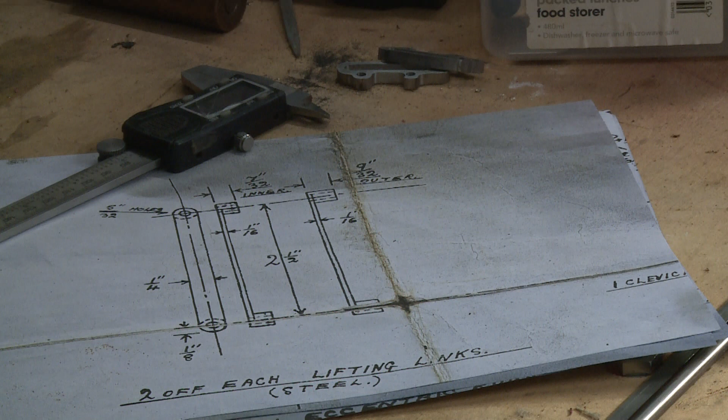We're going to carry on with the links that go between the eccentric straps and the valve rods. So you got the rods here. That's looking down on the plan. So we got 4 of those.

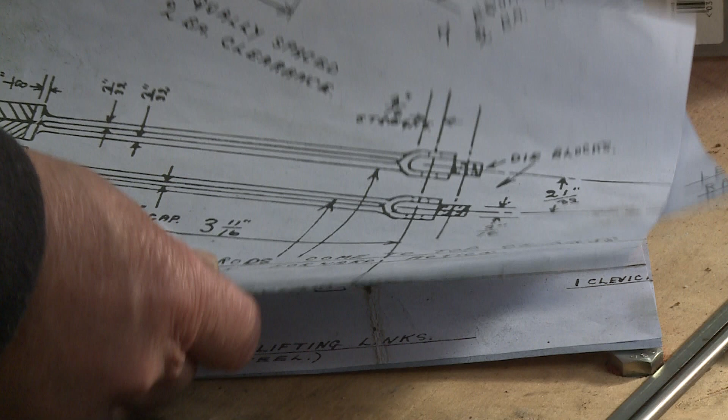That is the eccentric straps there, so they're bolted on there, going through to the link. Going through to the link. Then from the link, it gets joined on to, here's the link assembly there. The link goes inside there.

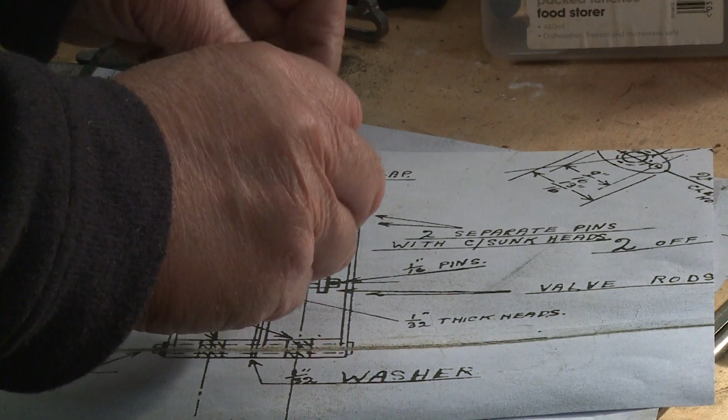So we got 2 each of these to make. You'll notice we got 2 of these and 2 of those. They're 2 different lengths there. So what I'm going to do is start off with those.

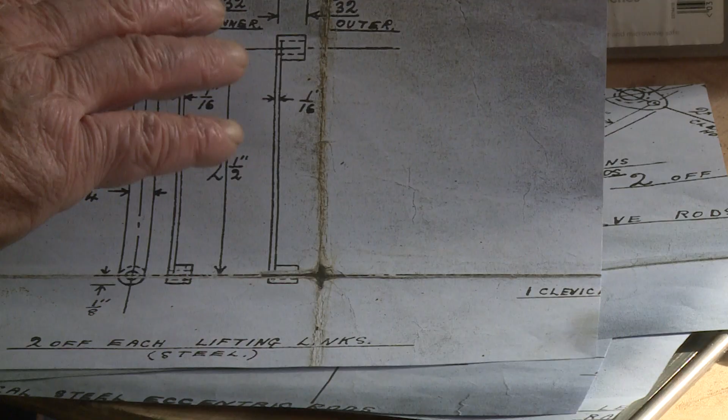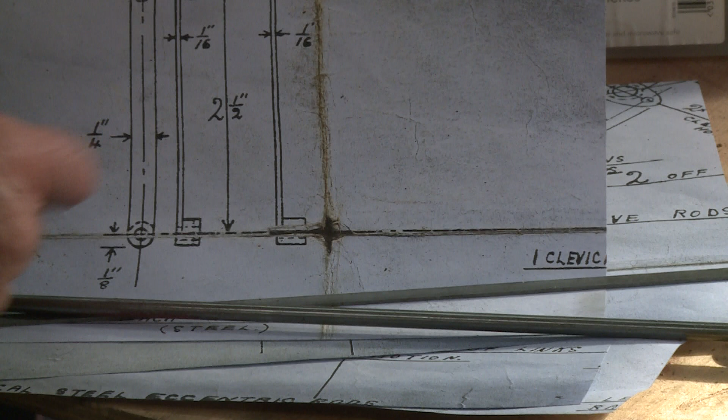So I've got some 1/4 inch by 1/16 flat, which I'm going to do 4. The holes are the same distance apart. 4 of the flats. Then the round we put in the lathe. We'll drill a hole through it.

But what I'm going to do there, I'll just see if I can find a pencil. 1 minute, bear with me.

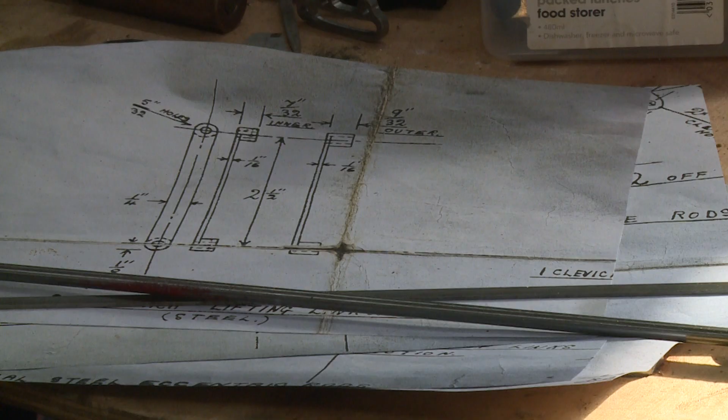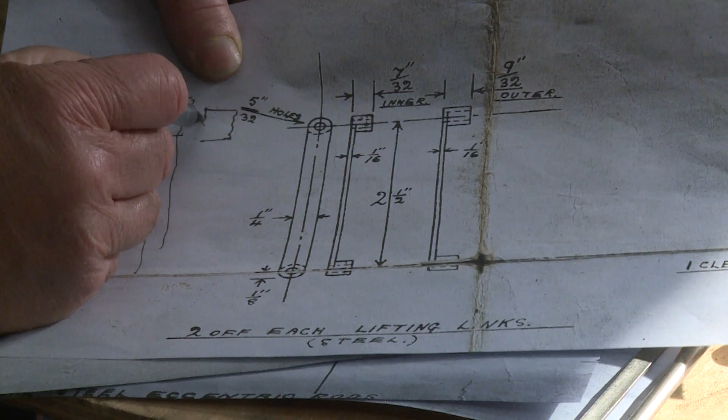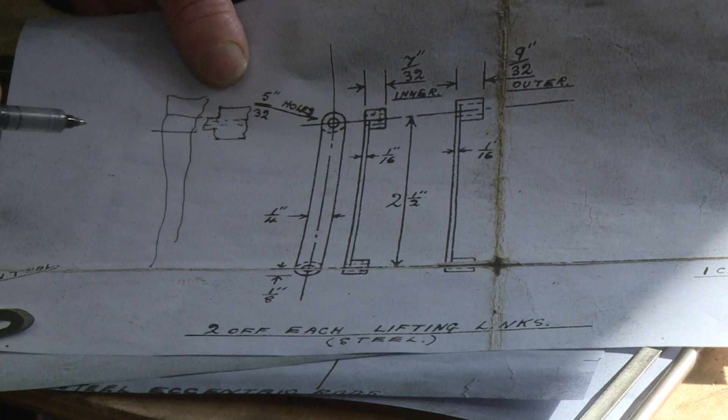So what I'm going to do here, where you've got the metal with the hole through it, the round with the hole through it, what I'm going to do is drill my round with a shoulder on it. So the hole is the right size through the round, and the hole in the flat is a little bit bigger. That way when you come to silver solder these little bits on, they're located in the hole. That's not to scale, that's a load of rubbish there.

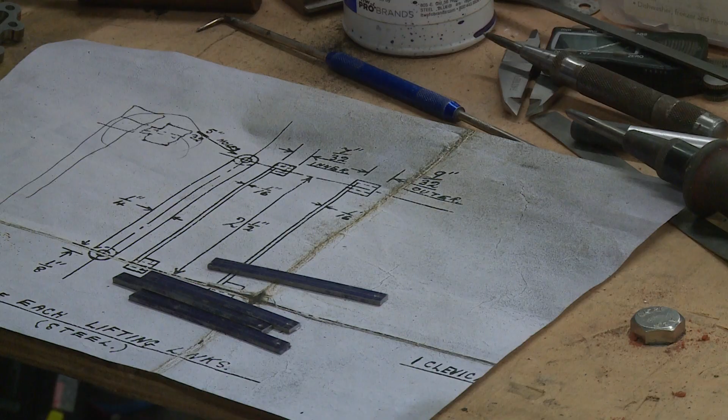Right, so I'm just going to get some Dykem on my flat and start marking them out. I got a little bit of Dykem on there. Just got to let that dry before we can mark it out. Right, so I've marked these. All I've done is marked one end, one hole. When I put that into the milling machine vise, I'll do one end and then use the digital readout to move over 2.5 inches to the center there.

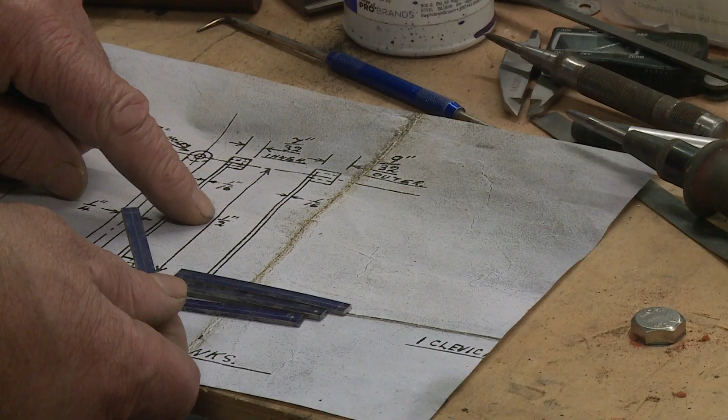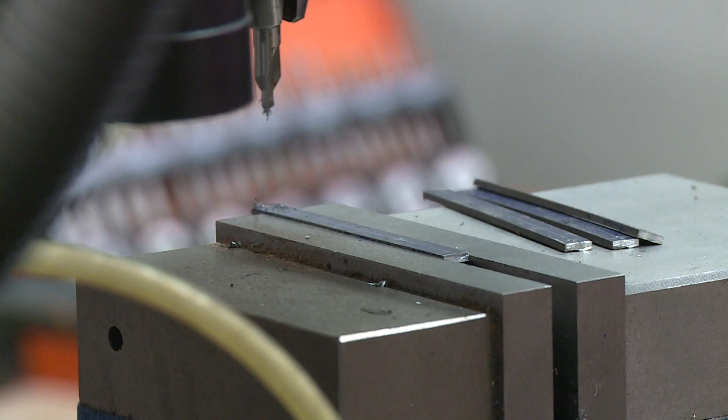Right, so let's get these in the milling machine and drill them off. As you can see, I got this in the vise on the milling machine. Got a center drill in there. I'm just going to mark that first hole. Now I got to find a drill to go in there. In the little round parts we needed a 5/32, and I've gone a bit bigger because I'm going to turn the round parts with a shoulder on.

Right, that's that one done. And I'm going to move that over 2.5 inches. 2.5 inches. There we are. Right, so do the same again. I think this time I'll put a smaller drill in first before I put this drill in.

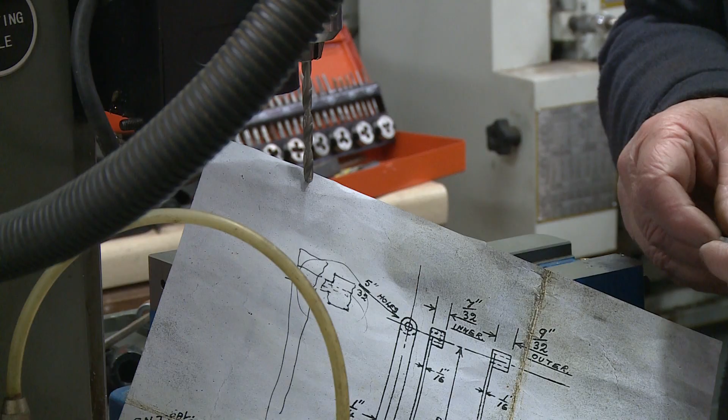Right, so there is the 2 pairs of these made. Now what I'm going to do is get my 1/4 inch round in the lathe and turn those up.

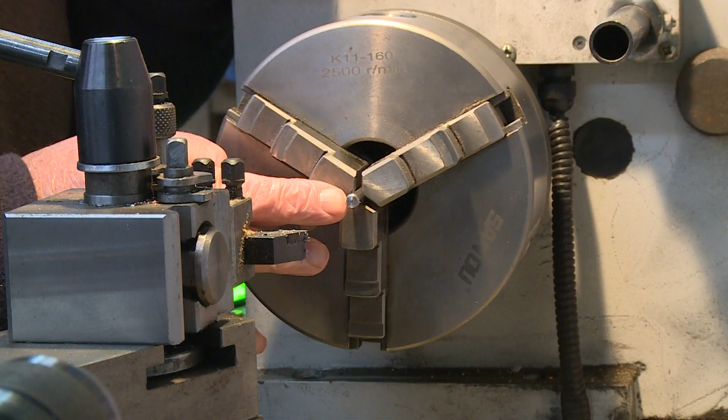Right, I'm just machining the shoulder on the 1/4 inch round to fit in the hole in my little flats. A little bit more. Once I get the right size diameter, it'll be the same for all the others. I want to get it as tight as I can because then it'll be more accurate when I silver solder them in.

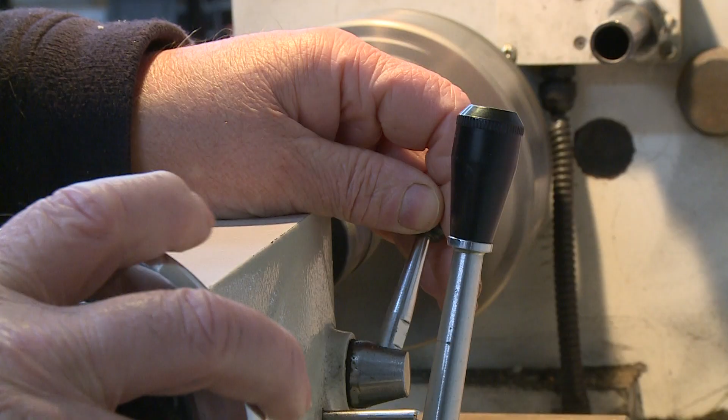Oh, beautiful. Right, next thing I'm going to do, drill the hole in there. I'll just set that to 0, so if I do move that out, I can go back to 0. Right, center drill. I'm going to have to move that anyway, so that's the center drill. I'll just find the right size drill for that. Right, 5/32 drill going in there.

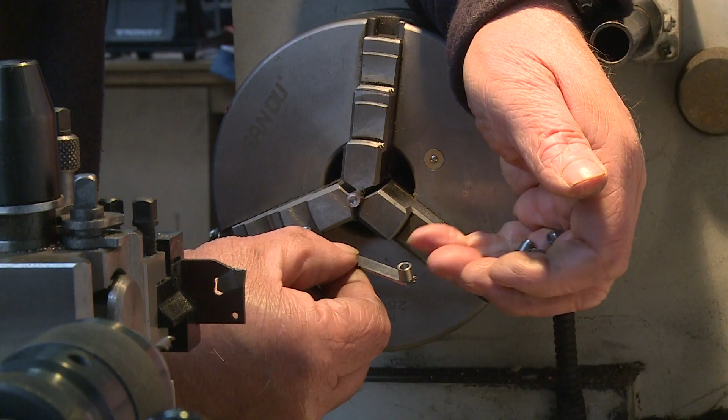Right, so don't know if you can see that. That will be what it'll look like when they're silver soldered in together. And that's the other parts there in my hand. So they'll be ready now to silver solder into all the flats.

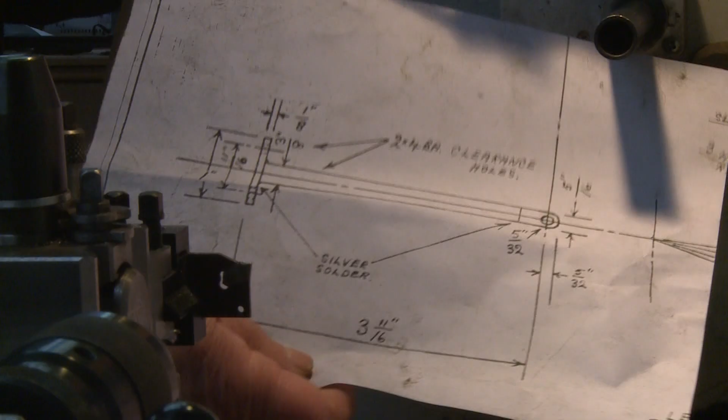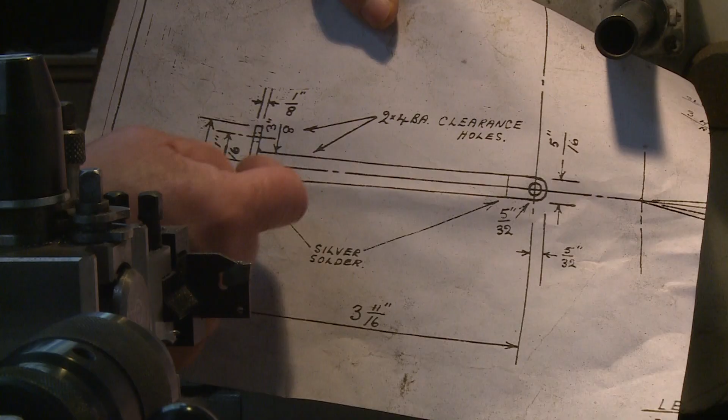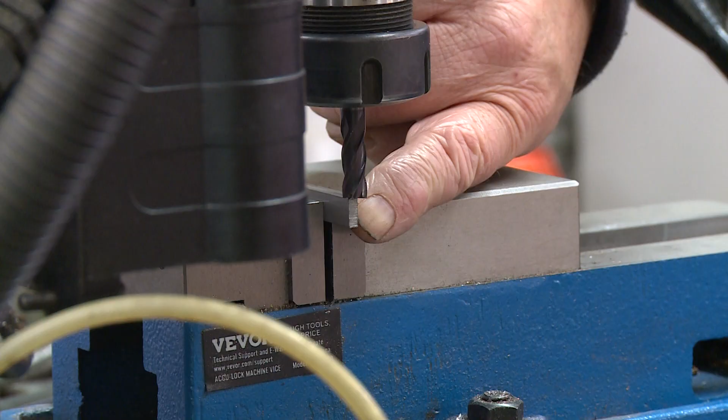Before I solder these, I'm going to start making this part here. This is where your eccentric straps are going towards the link. So the first thing I'm going to do, I'm going to find some 1/8" flat, make the end plates which bolt on to the eccentric strap. Right, so I'm just going to take this down to the thickness of the eccentric strap.

Right, a little bit more. Right, this is the last cut.

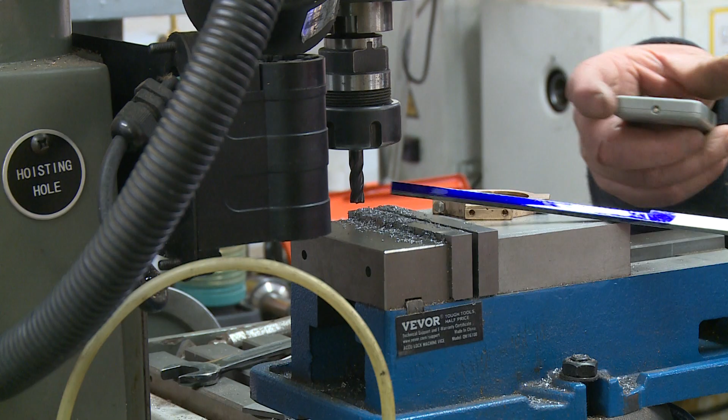Right, so I got some Dykem on there, just got to let that dry, then we can mark them out. Right, so I got all of these marked out on here. That's 5 because we got 5 eccentric straps, but 4 of these is for the valve eccentric straps. So now I'll get this in the vise centered up and then we can drill each hole. Right, so I've got this all lined up centrally this way. I've got that set up there, so I'll just drill that first hole.

Right. Now we're going to put a 4BA clearance. Beautiful.

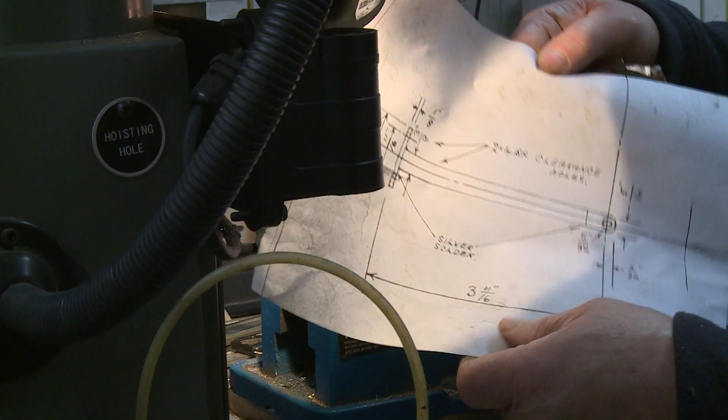Right, so that's the 5 little pieces made, and they will go on the eccentric straps on there. So the next piece we got to make, let's turn that light off. Don't know if you can see that. Is that bar there? Now I've cut 4 pieces at the minute.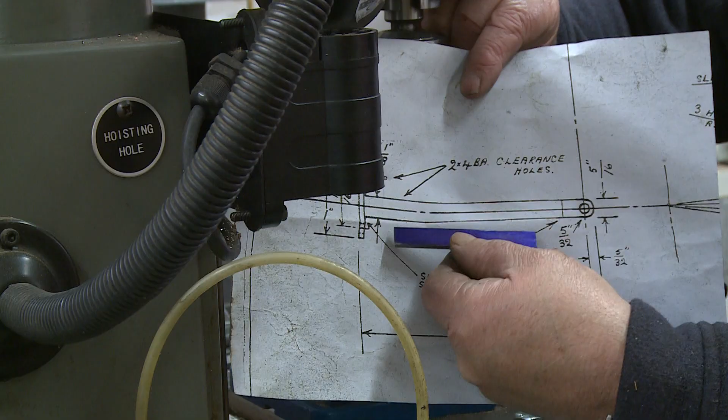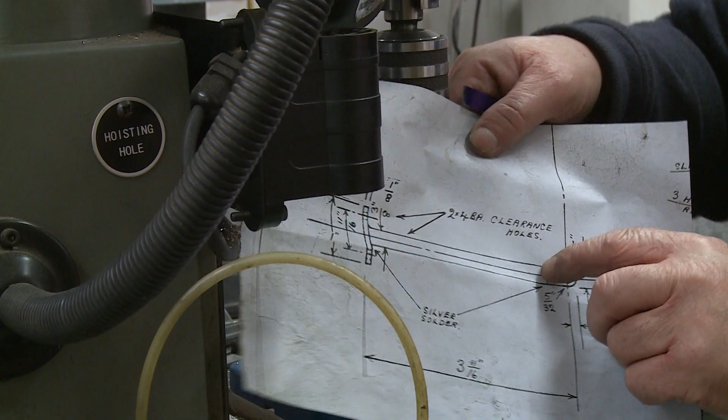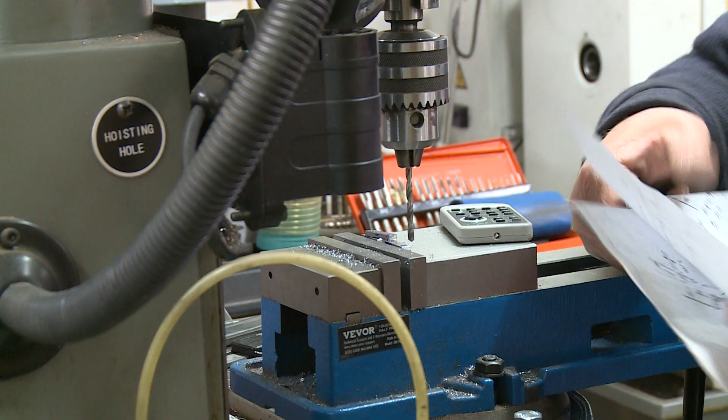We've got to machine these 3/8 wide where it goes on that plate there, to 5/16 of an inch there, which there'll be a U there. I'll just get the other piece of paper if I can find it. And then we've got to make 4 of those U's, and they're drilled through, and they're going in a block which slide in the link. So that's the next job. Machine these down 3/8 to 5/16 over that length.

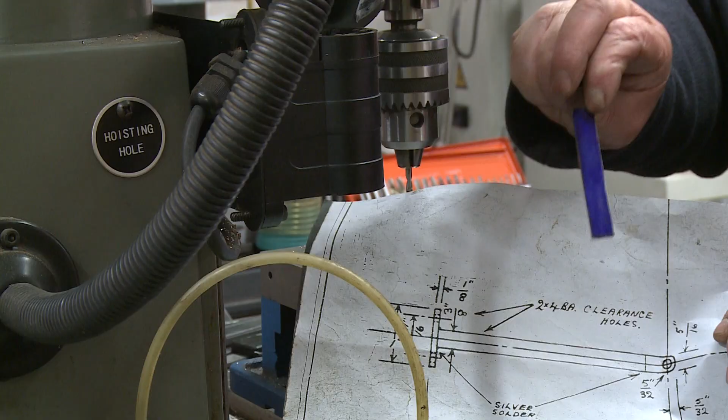Right, as you can see, I've marked these plates out. That's 3/8 to 5/16, and I've got one set up here in the vise to machine down to that line. So that is what we're going to do.

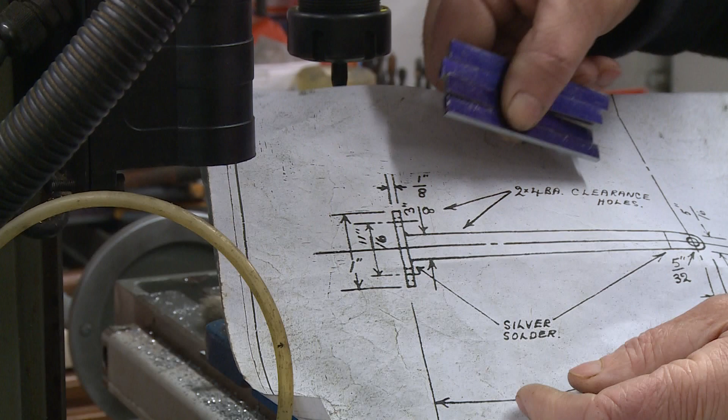Right, that was the last cut of the 4th one. Move that over there. Take that out of there. Right. 1, 2, 3, 4. So they've all been machined. Three-eighths wide there, 5/16 there.

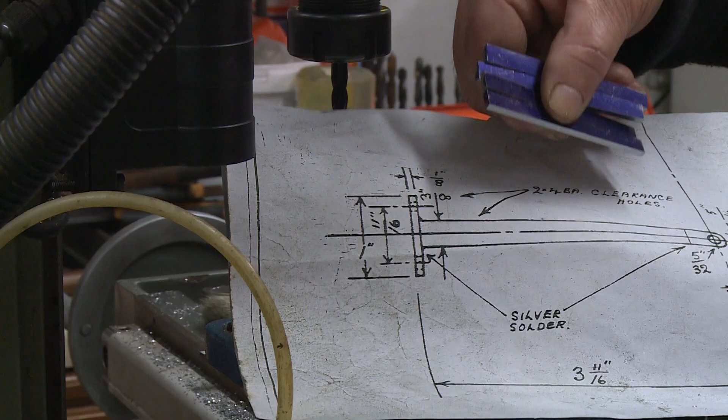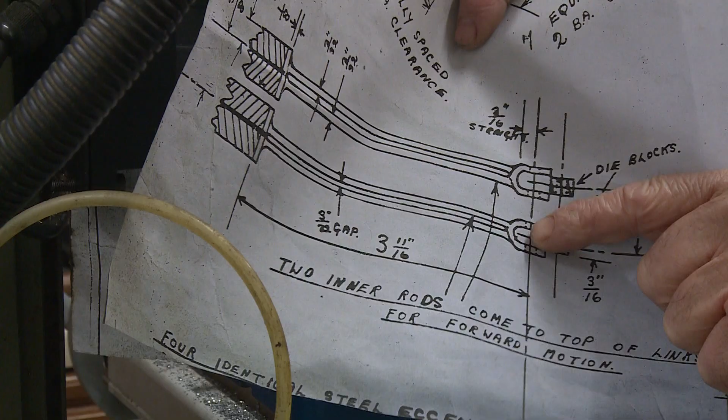Obviously this drawing is not to scale. The original drawing is starting to come apart at the creases, so I've taken a picture and just blown it up. Right, so that's that plate's done, these 4 done. The next thing, I'm going to have to make a little jig to make the U's on the end. So I got some 3/16 round, and I shall tack that on the top of some 3/16 flat, make a jig so I can stick the end of the bar in and heat it up and bend it over. So that's the next thing we're going to do.

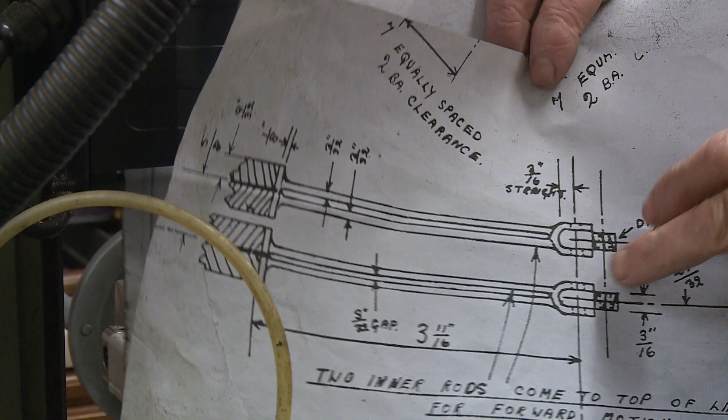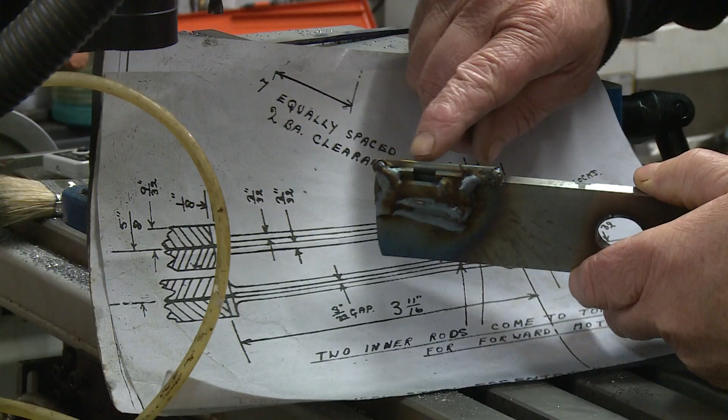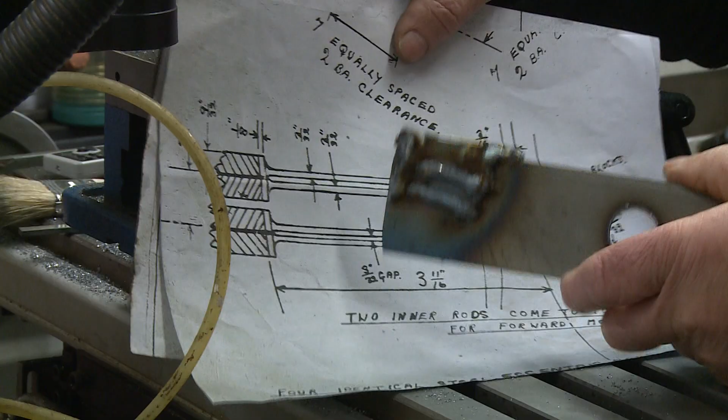Right, so as we've got to make these U's, I've made a quick jig. I've got some 3/16 round here, and I've made a jig so that I can heat up my metal, drop it in there and bend it over the 3/16 round to make the U. So that will be the next job we got to do now. Right, so I've set up here to bend my little U's.

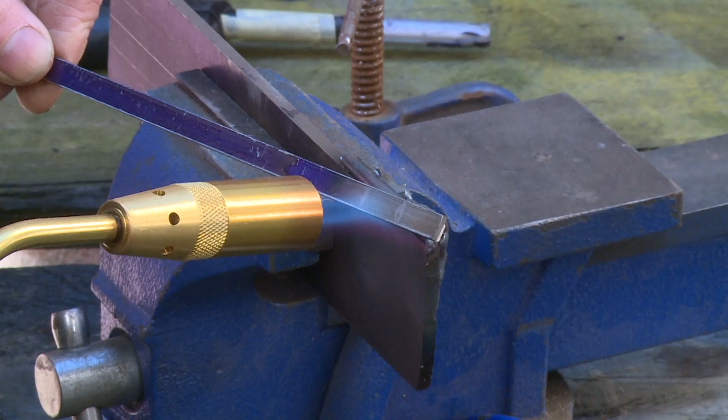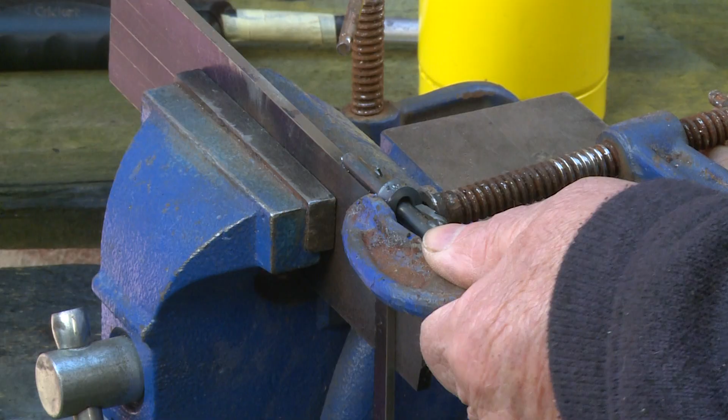Right, it should go in there. Bring that straight on over. I've got a clamp here, which I'm going to clamp that in to make sure he's nice and tight against there. Beautiful. And that bent nice and tightly to there. Let's just knock that out. There we are. And then I can trim that to length. I'll do the other 3. Get back to you.

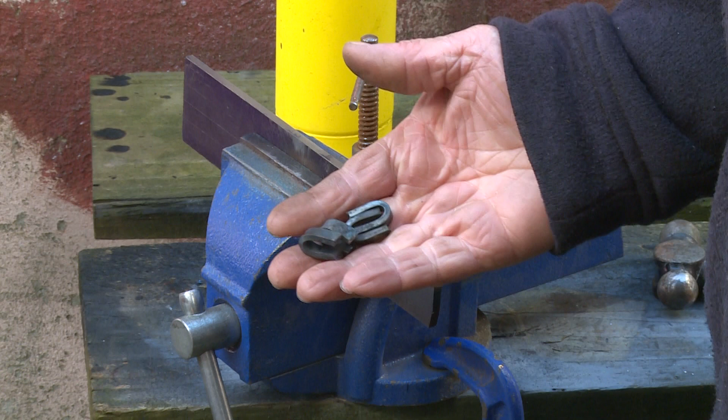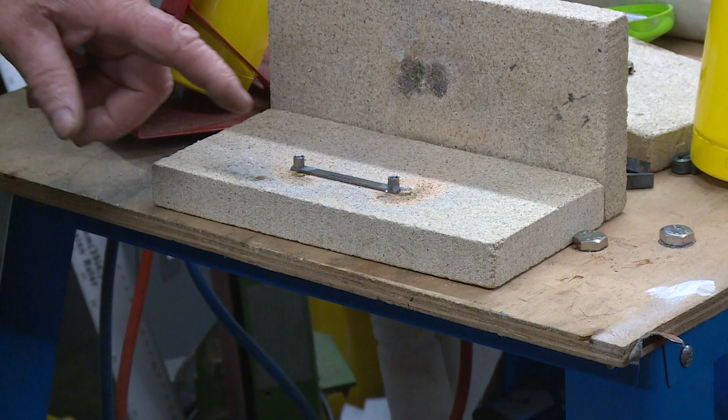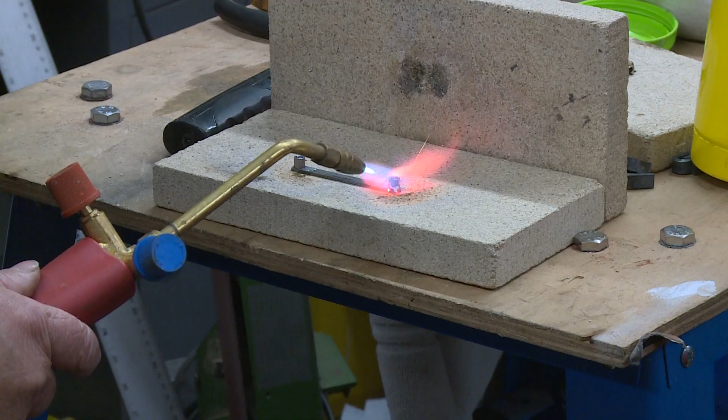Right. So there's the 4 U's there. What I can do now, I'll cut these to length and drill them when I've silver soldered everything together. So that's the next job now. Silver solder all those little bits we've made together. Right, so we're set up here to silver solder these bits in. I'll just do that. I've already put flux around the parts.

Beautiful, that's 1. Two. Right, that's 1 of those done. I'll just do the other 3. Right, that is those 4 parts soldered together. Next thing we got to do is set up the other parts with the U. So I'll just do that.

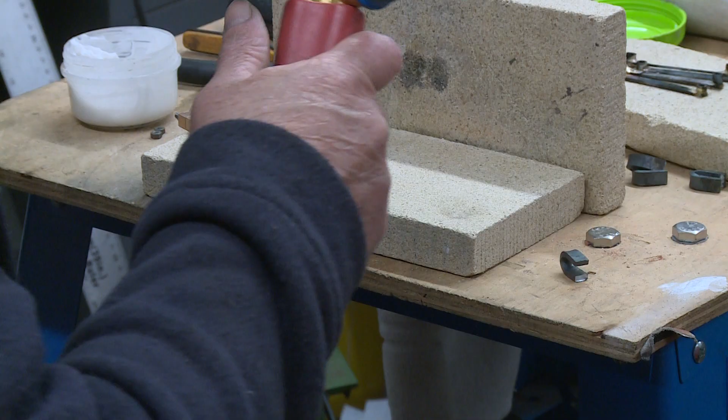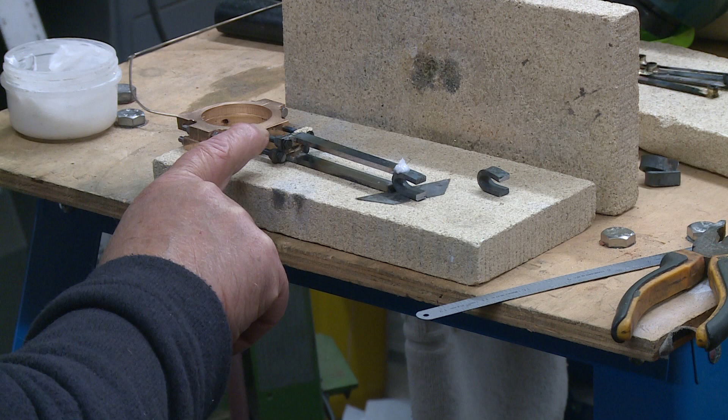Right, there's the silver solder running there beautifully. Turn that off. Just wait for that to cool down a little bit, and then I've got to jig that up so that the U bit is in the right place. Right, you can see I've got these jigged up here, 2 together, so that U needs to be roughly in the middle of the 2 eccentric straps when they go on the link. So we're trying to get that silver soldered in. It's all in line nicely, all fluxed. See if we can get that soldered on.

Beautiful. Just let that cool down. Right, so that's one U done. I'll just jig up and do the others, and then I'll get back to you. Right, that's 2 done. When you look at the drawings, and these are on the eccentrics on the crankshaft, the link goes in between those 2 U's.

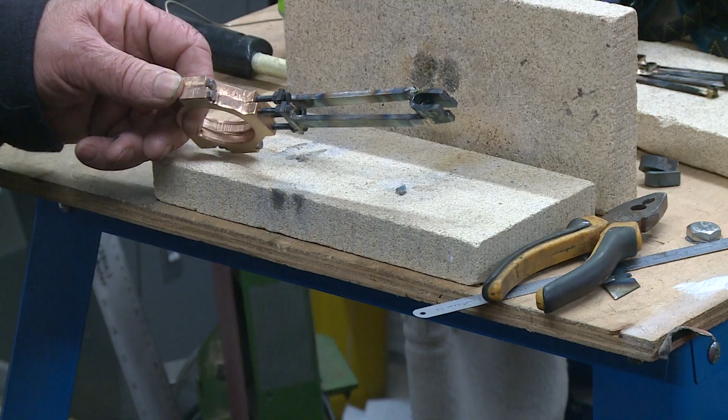So anyway, so I can get this video on today, I'm going to call that for today. I'll get this video on, and then by the time the next video comes, I'll have the other 2 of the U's and rods all soldered up together. And then we'll have a mock-up of the parts here. What I've got to do is measure from the back of that plate to drill the hole, and then trim these all off nicely. So that's it. I'll get this video up, and I'll get these finished for the next video.